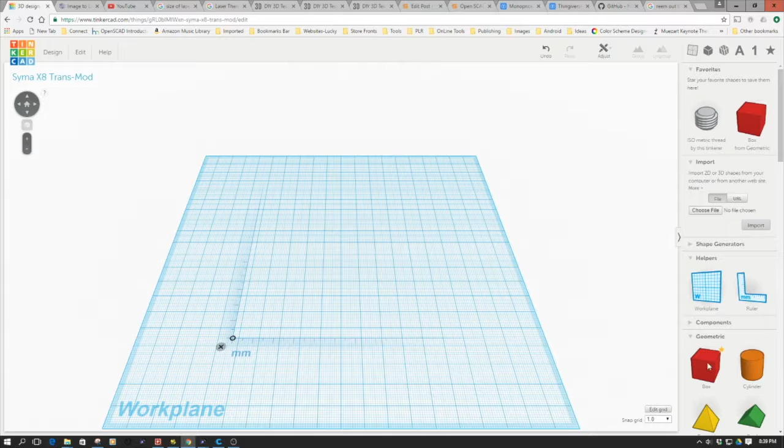So what we're going to do is start with the base here. My measurements—I've already taken the measurements of the controller and the antenna and pieces like that, so it's very important to get your measurements up front.

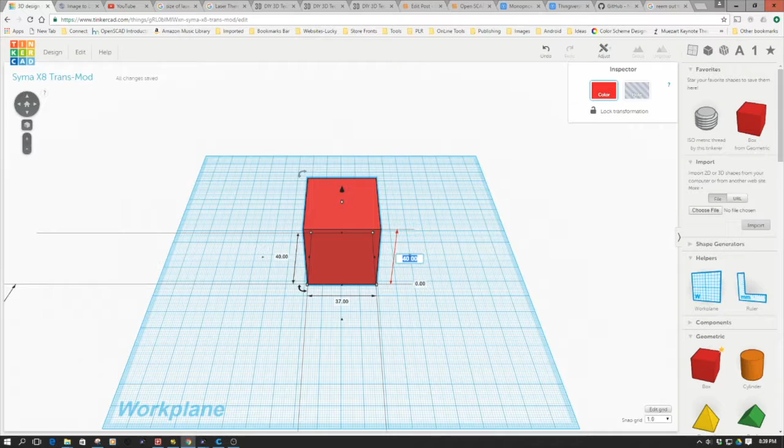I'm going to go to about 37 wide, and this is all going to be in millimeters. Even being in the US, I find it's kind of the easiest to work in. Another important thing is to keep your dimensions straight between X, Y, and Z. So this is going to be the base module that's going to actually attach to the Syma controller.

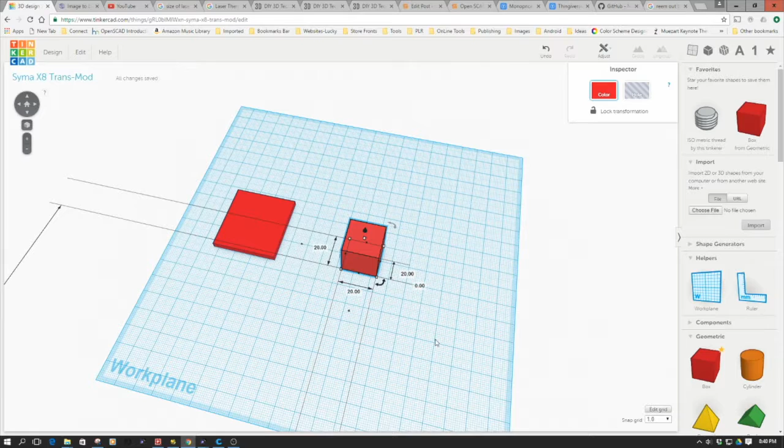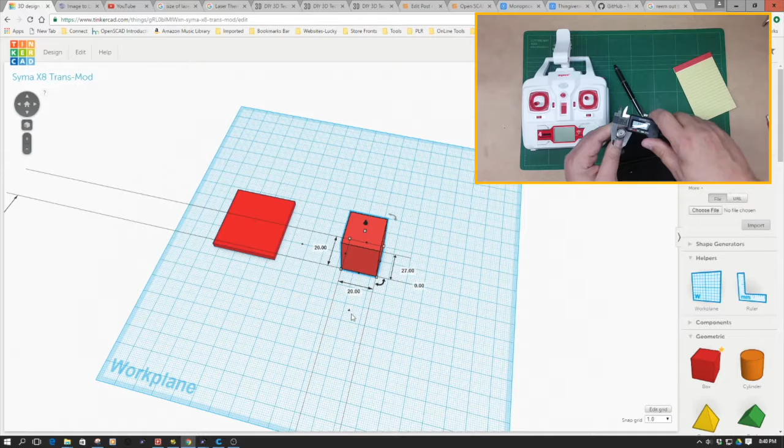Now the next thing I want to do is get that for perspective, but now the other piece I'm going to move in here is going to be the block for the actual antenna housing itself. I've taken the measurements, and I need to be about 27 millimeters tall. Then I need to be about 24—I'm doing some estimation here—so I'll leave this at 20, about 19.5 wide and then 17 tall.

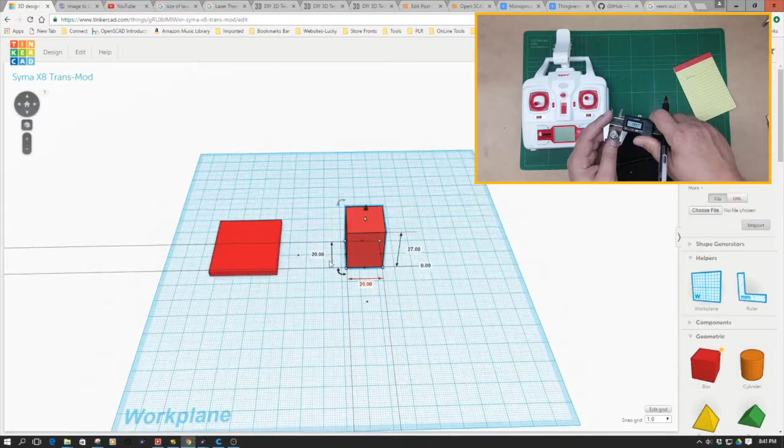So I'm going to make this 27 tall. And then I wanted this to be—so my opening is going to be about 12.25 millimeters, just kind of thinking aloud here.

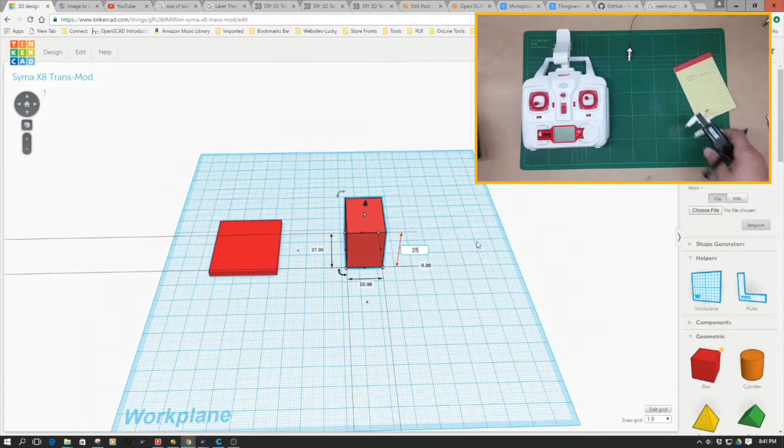So I want it at least 25 millimeters so I can offset it. I'm going to make this 25, I think. Well, no, I'm going to go back to 27. So 27, and then I'm going to actually make this now 30 tall, because I have that.

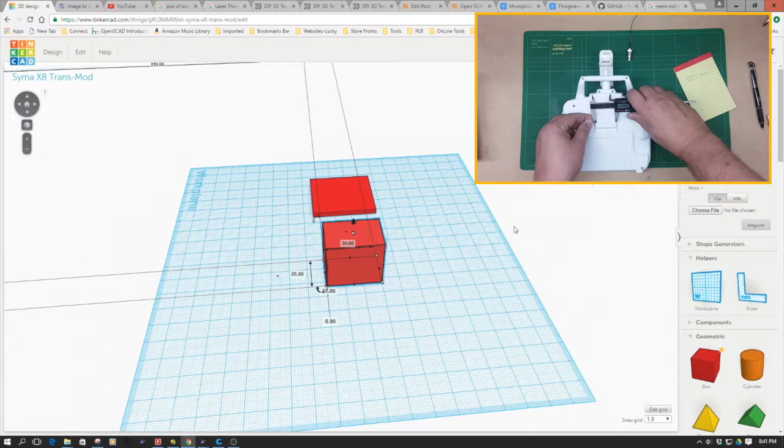So now this will be my base block to mount my antenna, and then I'm going to change this to an orange, so if I click on orange I can actually see the delta in color.

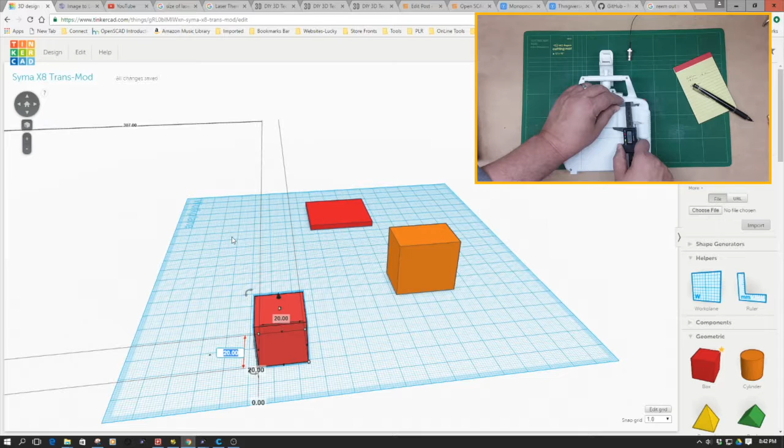Now one of the things I want to do is taper the back edge of this. I want to bring this in, and make this a little bit wider, and then take this—how long this is, 20—I'm going to make this about 30, and then I'm going to grab this arrow and rotate it to about 45 degrees, and if I hit shift, it'll lock it into 45 degrees.

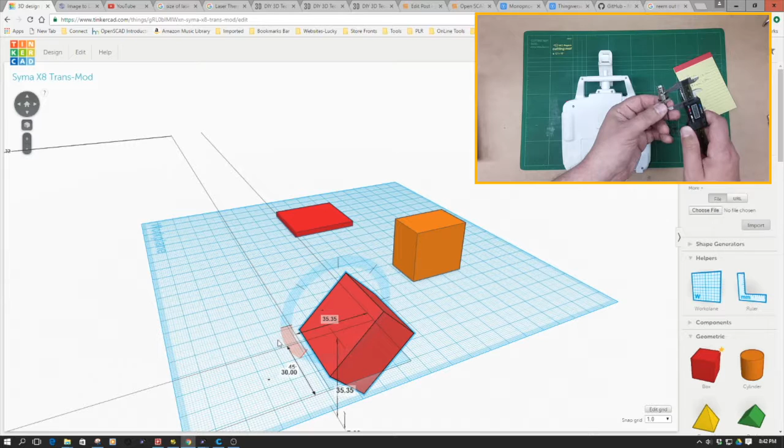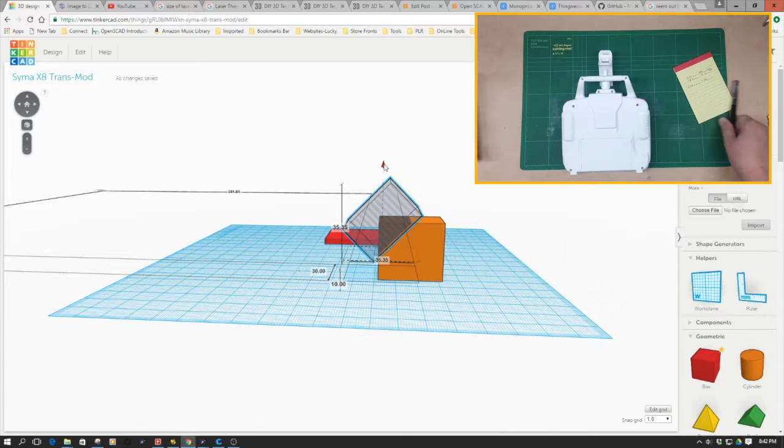I'm going to turn this into a hole, and then intersect it with this, and then raise it up just ever so much to create—because what I want to do is take a notch out of this back, so it actually sits on the table a little bit, or sits on any type of flat surface. I just want a little bit of a notch, not too much of a notch.

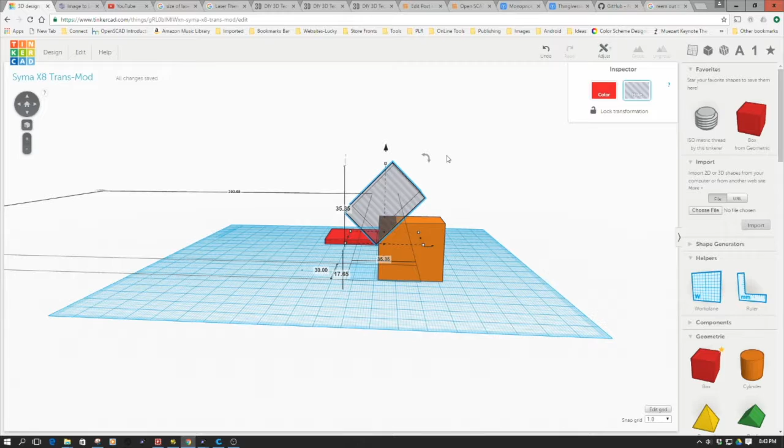You can move up and down with the cursor keys. So, I got that. Alright, so now I'm going to join this, and then group this, and boom, I have sort of my notch.

Now what's going to happen is this is going to sit on top of this, and I'm going to pass some screws through this. But before I do that, I need to actually hollow this out. So I'm about 20 wide right here, so I have to leave myself a little bit of a shell.

So what I'm going to do is duplicate this, and take this duplicate—since I'm going to need about 2 millimeters on each side, that's going to be about 4 in total. I'm going to drop this down to about 16 millimeters in width, and then I want the same on the top, at least 2 millimeters.

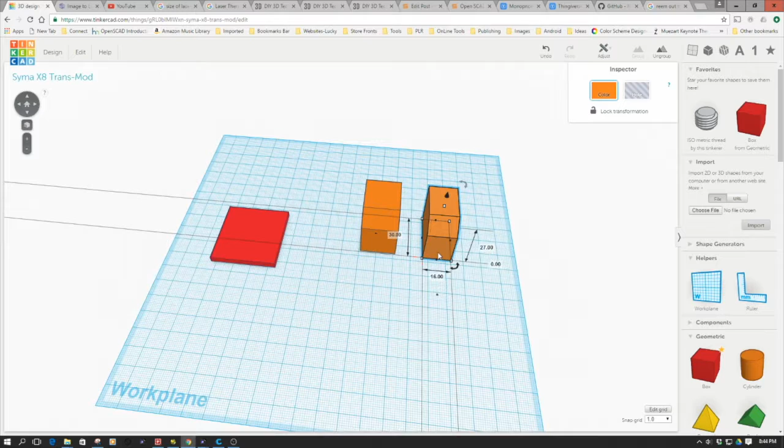So I'm going to drop this. Actually, I'm not going to drop it at all. I need to think about this a second, because I'm going to use this to actually pull it out. I'll show you that in a minute. So I've got my width, and I just need to do my depth now. So I need to back off the 30 by 4.

So now I need to be at 26. And then what I'm going to do is do this as a hole, and then put this actually inside of here. Now, one of the things I need to do is lower this down, and I need to move this out of the way. So what I'm going to do is use my center tool to do an align.

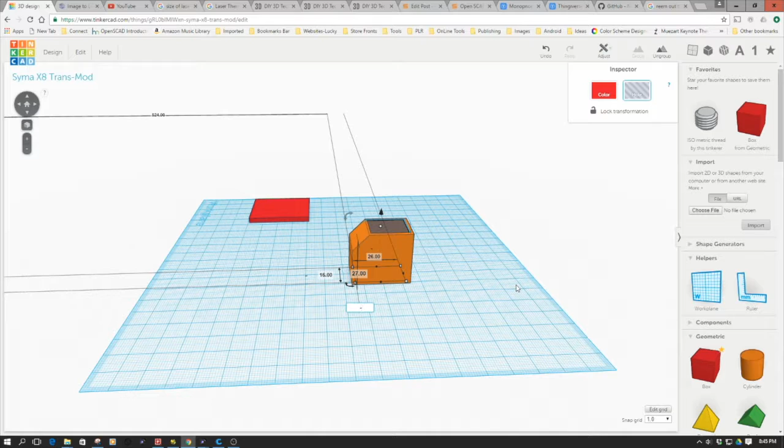So this is going to be aligned, and this is already aligned here, so that's good. However, now what I need to do is go here and say I'm going to go -3. And so what that has done is pulled my block down, so it actually sticks out the bottom.

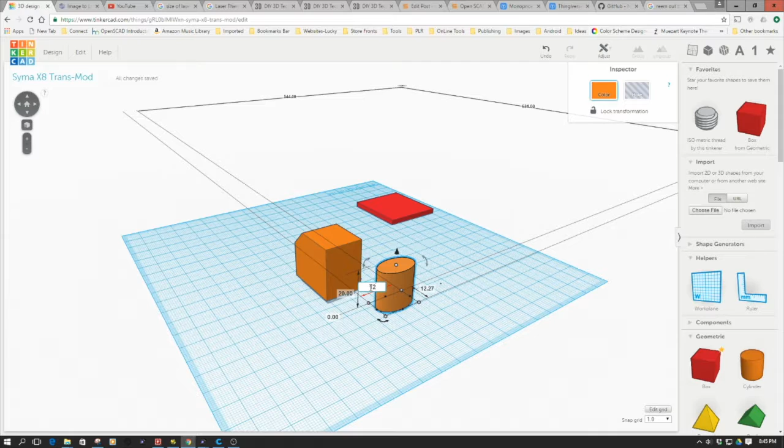Now, one of the things I need to do is also create my round opening. So my opening is about 12.25 millimeters, so I'm going to go about 12.27 to give myself some extra room, because plastic tends to expand. So 12.27, and that's pretty good.

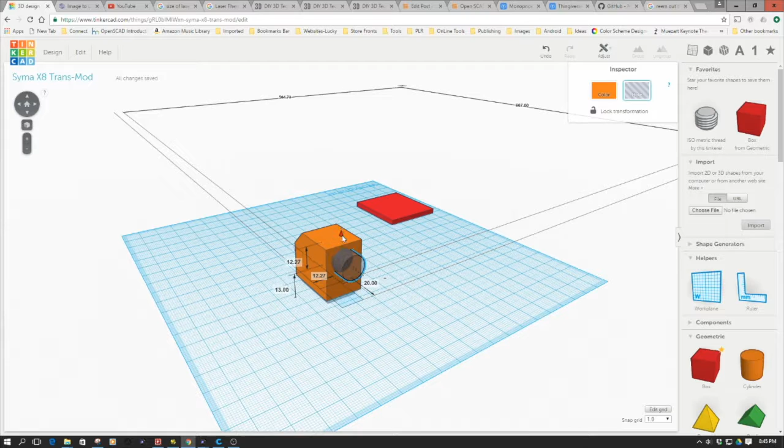And then what I need to do is turn this at 90 degrees. So I hit the mouse and the shift key, and now I'm there. So this will make the opening for my antenna mounting, or my lug, which the antenna will connect to, and that will sit in there.

Now, one of the things I do want to do—I am terrible with that, you'll find out with the saying 'do want to do.' So I've now centered that. I should be pretty good there.

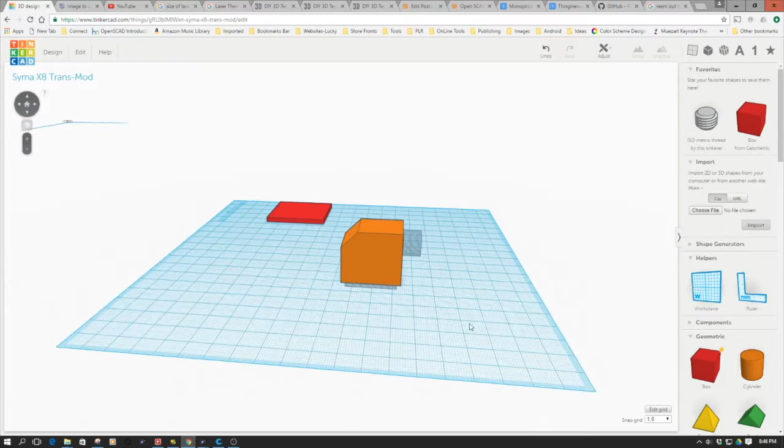So I've got this, now this is all good. Now what I need to do is bring this in and kind of center it. So I'm going to use my center tool, under align, just to bring all this into center.

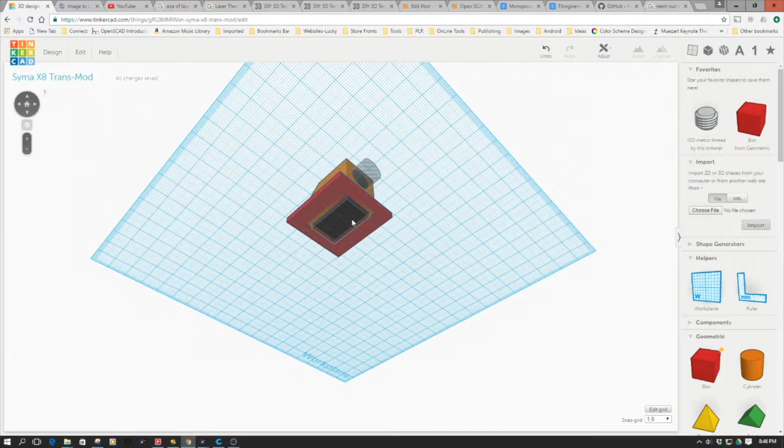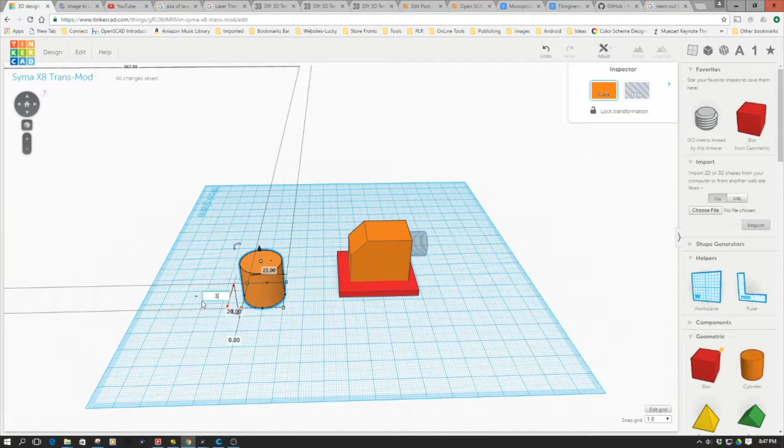And so you see I've got my piece sticking out the bottom here. So this is sticking out the bottom, and now the only other thing I want to do is create some bolt holes for this. So what I'm going to do is about 3 millimeters. So if I go by 3, I go 3, and then I turn this into a hole.

And then what I'll do is duplicate this, so now I have 2 of them. So we will see if we can't get one in the front and one in the back. We might have to do some jockeying to make this all work.

So I don't know if I have enough material on the front. I might have to do some readjusting, because I've got more in the back. So I can go up. So I want to select this and just scooch it up a little bit.

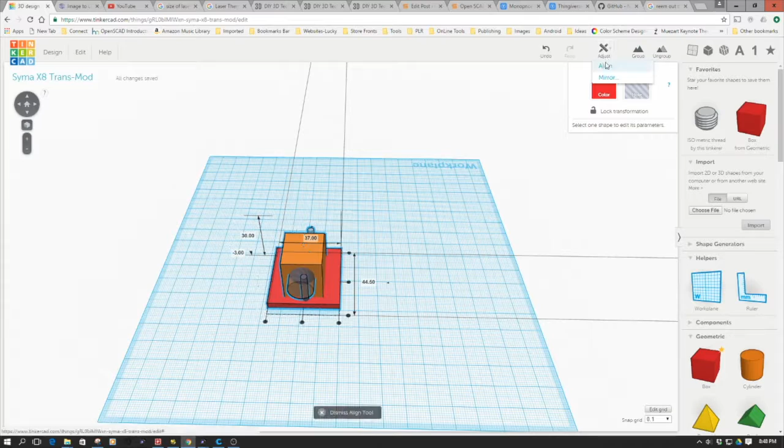The other thing I need to do is change the snap a little bit so I have a little bit more latitude. And then what I want to do is again kind of go—I'm going to highlight all my objects, and then I'm going to redo an align, and then boom, I've got this set up.

And so now see, I've got my holes. This one's looking a little bit tight, so I'm going to scooch this up a little bit, and then what I'm going to do is take this, select this hole, and also scooch it up a little bit. There, well, I'm going to go a little bit more.

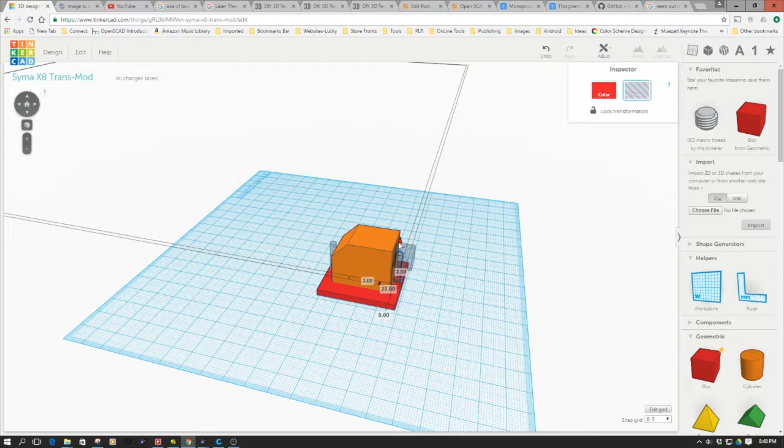And I'm sticking out proud enough of the block, I don't think I'll have a problem with this screw head. And then I'm just going to move these down a little bit so I'm clearly sticking through the piece. And I'm just kind of taking a look at everything, so you can kind of see how all the pieces are arranged.

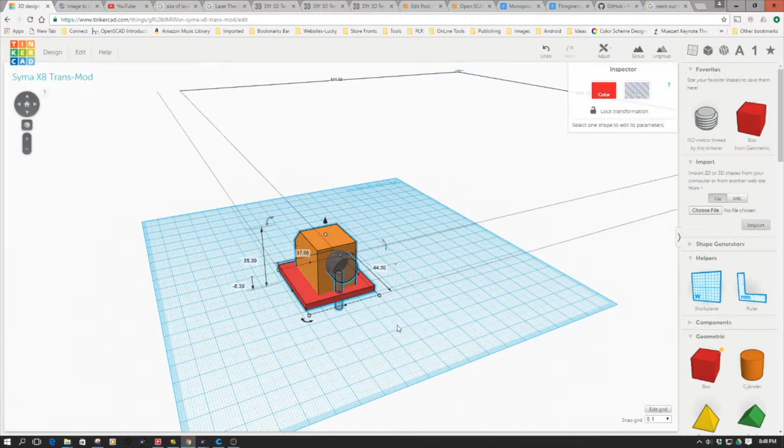And I just want to make sure everything's centered. So what I'm going to do is highlight this whole thing, and then hit group, and there I go. So notice how it's hollowed out, and now I have my object.

I do want to check something here, so I'm still at 37, and I want to make sure I'm at 40. That one top bolt hole is still concerning me because I still have a little bit of room in the back.

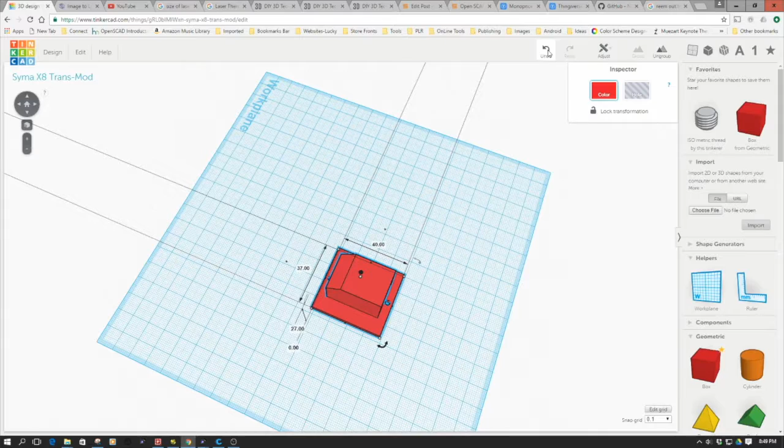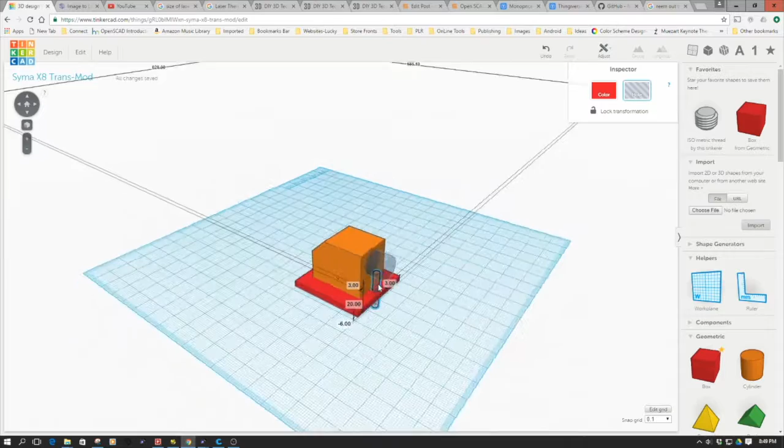Alright, so now I've got my piece, and the next thing we're going to do is send this to the printer and print, and then we'll go install it. So let's hop over and check out this thing printing.